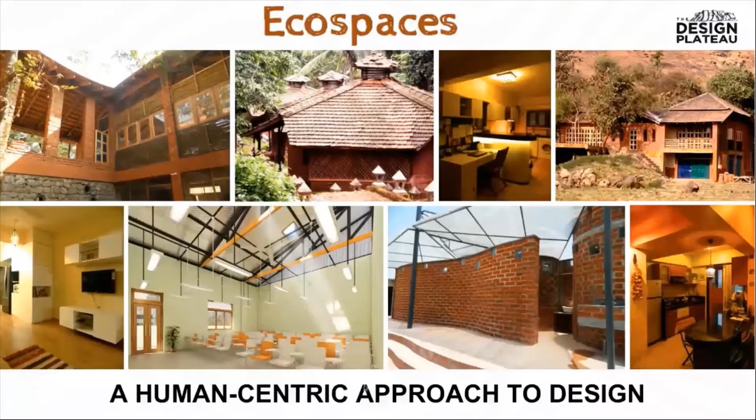If you look at the world carbon dioxide emissions, we are fourth, so we are contributing in a big way. And if you see the recently released World Meteorological Organization's report on the impact of climate change and the status of the world countries, you'll see that there are huge impacts. For example, our global carbon dioxide emissions have hit a record high of 407 parts per million in 2018. The ocean heat has recorded the highest levels.

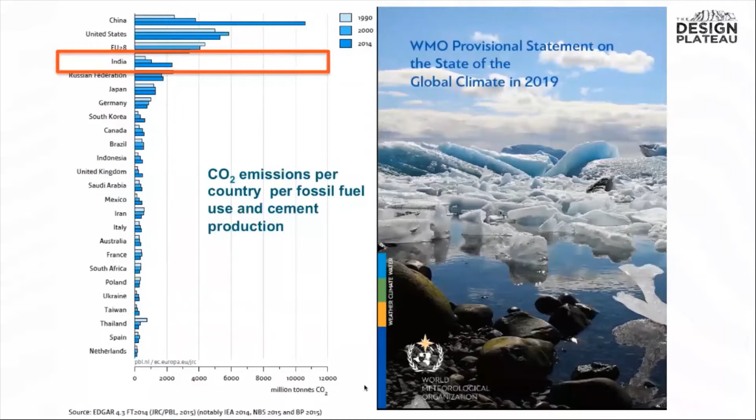And because of this, there's melting of ice, there's a whole change in our global ecosystem. Almost 26% of the seawater is today acidic as compared to pre-industrial times. And one of the main impacts that we are going to face is more erratic rainfall and weather patterns, threat to our food systems, and a whole lot of other challenges such as floodings that we will have to be prepared for in the future. And architects do have a big role to play in this.

So let's look at the building sector and its contribution to this whole mess that we have created in the last few hundred years. We are the single largest contributor to climate change. 30 to 40% of the total global greenhouse gas emissions are because of buildings, in addition to 1/3 of the global energy use. We use 40 to 50% of the total flow.

Almost 3 billion tons of raw materials are being used. We generate 25 to 40% of solid waste, and 12% of global water use is used in buildings, which of course does not account for the whole lot of other water use in materials.

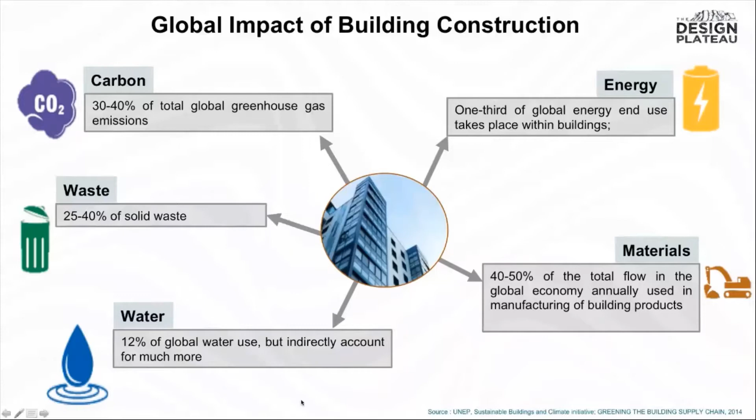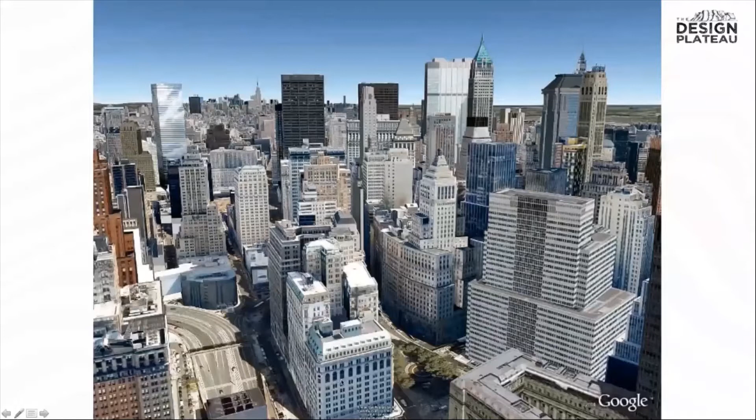So the built environment has an impact which is one of the largest. It's next only to agriculture in the impact it has had on the Earth's ecosystems. We have changed the face of the Earth in many, many ways.

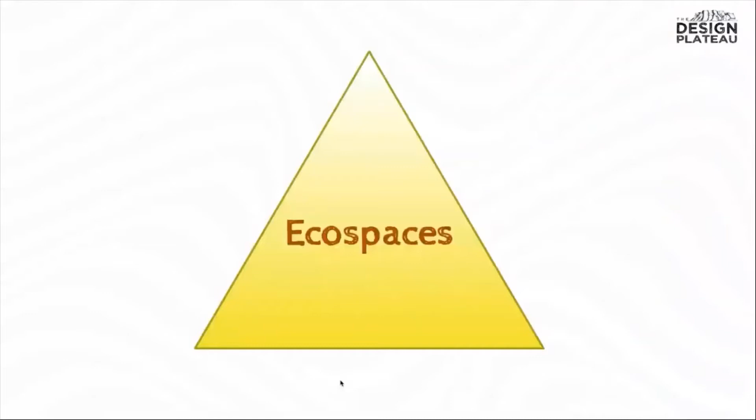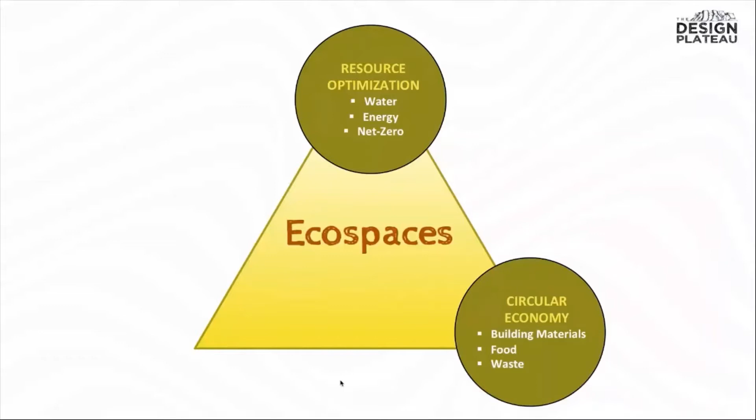So let's look at ecospaces, what it is, and what are the three cornerstones of this concept. The three cornerstones: one of them is resource optimization, using minimal resources. We are focusing here on water, energy, and making everything net zero. Circular economy, this principle of making everything from linear to circular, just as it is in nature, which involves building materials, our food system, and waste.

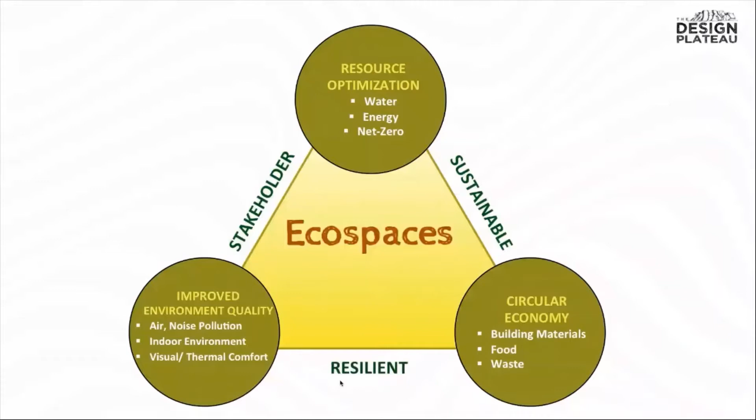And lastly, improving our environment quality, whether it is the outdoor air and noise or the indoor environment and the visual and the thermal comfort. All of these three are related, and they have a deep connection with sustainability, with making things resilient, and stakeholder engagement.

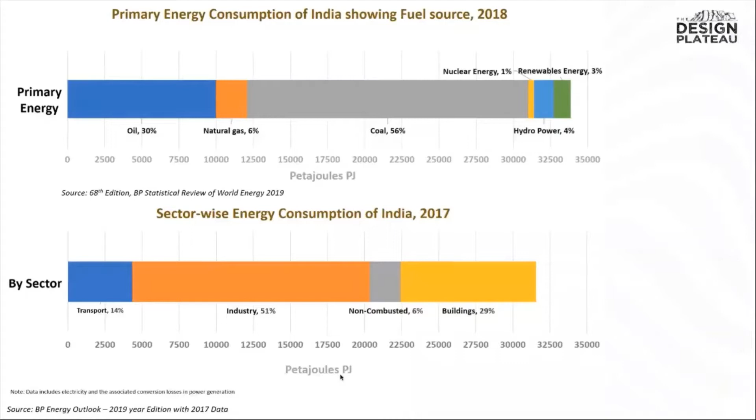So both these two graphs show us where we need to go. We need to be more energy efficient, reduce the fossil fuel, and then move towards renewable energy. So our challenge is plugging the fossil fuel emissions. So how can we go about doing this? If you bifurcate or trifurcate the problem, it exists in three ways. One is designing energy efficient envelope. The second is energy efficient equipment. And the third is going towards renewable energy.

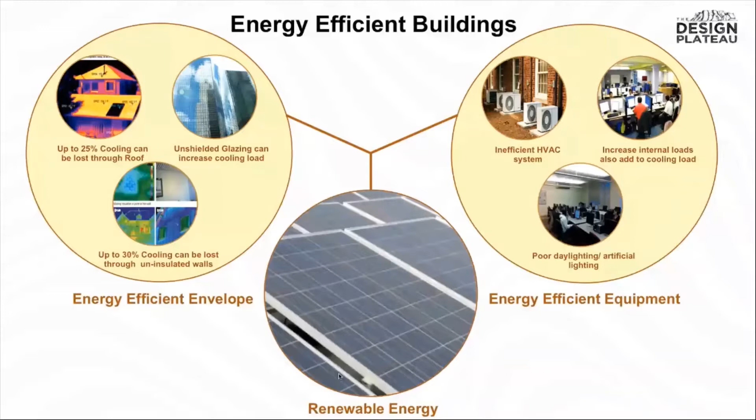This goes in a sequential way. For example, first make it an energy efficient envelope. So then you reduce your cooling loads, reduce your lighting loads, be energy efficient, and then the minimal thing that is left can be done with renewable energy.

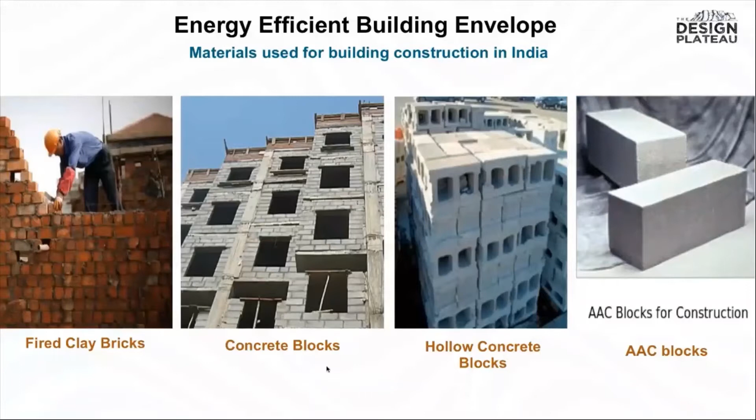If you look at building envelope, we haven't gone very far in India. For the external partition walls, we're still using fired clay bricks, concrete blocks, hollow concrete blocks. And it's very recent that we have come up with something as efficient as the AAC blocks, or autoclaved aerated concrete blocks, which are far more energy efficient. The challenge is in terms of the external building envelope, how to reduce the thermal transmittance of the wall.

So if you look at existing ones, where do we stand? A typical 230 mm brick wall, its U value is 1.5. And if our target is something like 0.4, we are way away from it, almost 3 times as much. So we have a long way to go. If we reach 0.4, then we are reducing the building's energy consumption to a big extent, 15 to 20% more efficient. And of course, that has a cumulative impact on the air conditioning load as well.

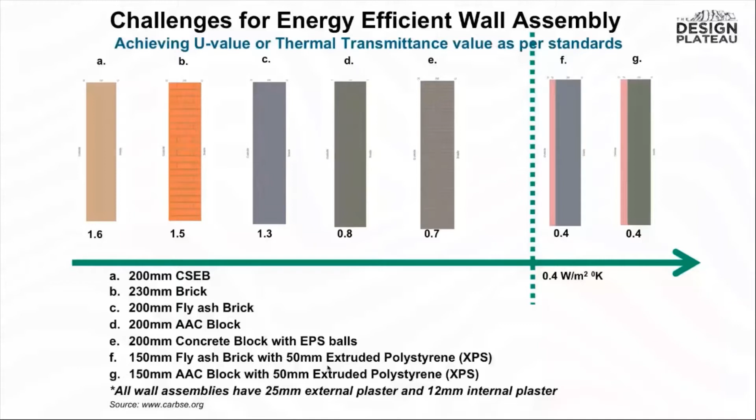So these are the given standards. We have the Energy Conservation Building Code, with standards for warm and humid climate, for example, of 0.4, and the existing walling material that we use do not reach this at all. So we have to be very careful about what we use on the external envelope.

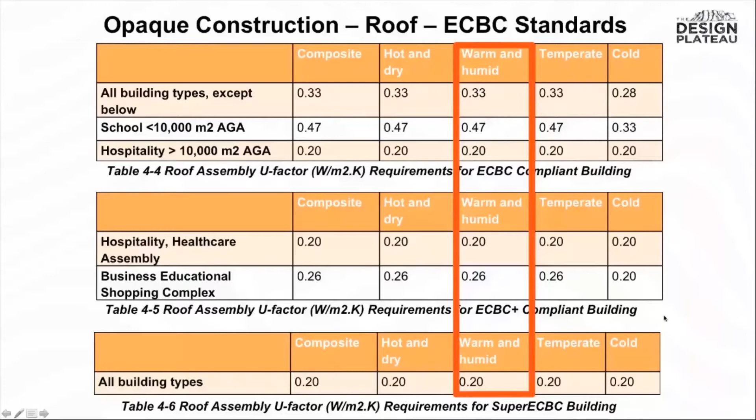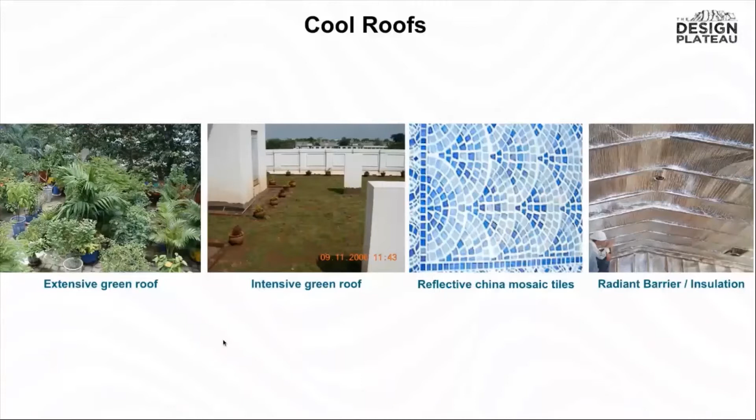So there are various ways. Of course, using a good material and a good insulation is the first step. But there are various other ways in which it can also be achieved, such as using extensive green roofs, shading for your roof. You can use a grass lawn on the top of your roof. You can have reflective China mosaic tiles, or you can have high albedo paints, or of course the radiant barrier insulation, which is the cheapest option among all these things. So there are various options, but it's important to know that we need to do this.

Now, there is a huge scope in all this to reduce the energy consumption. For example, what kind of lights can we make? Can we use more efficient lights, less lights, because there are so many lights in many places which are not being used, or they are just put on and so on.

There are fans. We have today the brushless DC fans, which consume half of what the typical conventional fans do. And then we have the 5-star air conditioners, which can reduce to a great extent the energy consumption.

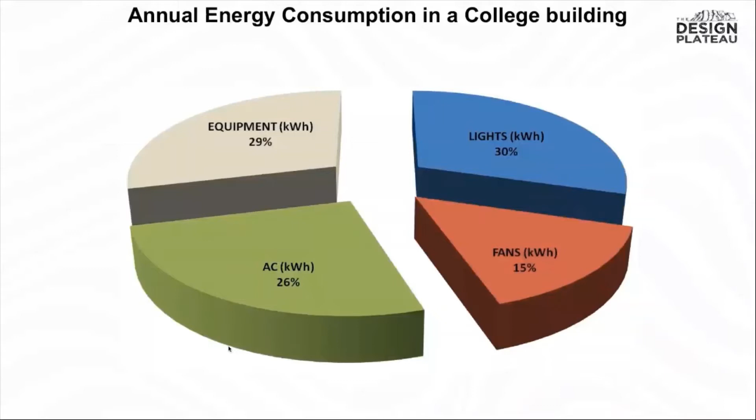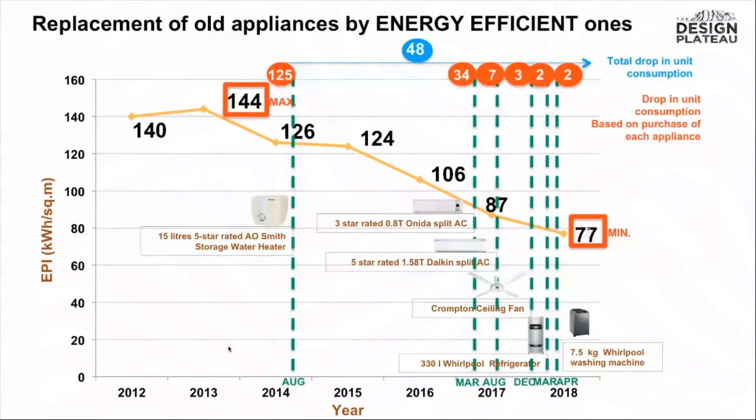And of course, the last step, which is making the building net zero or nearly zero. The Bureau of Energy Efficiency of the Government of India defines a nearly zero energy building as one which uses less than 15 kilowatt hour per meter square per year. This is a very high target, and this is similar to the passive house target. But if this can be achieved, we will be way ahead in reducing our carbon emissions.

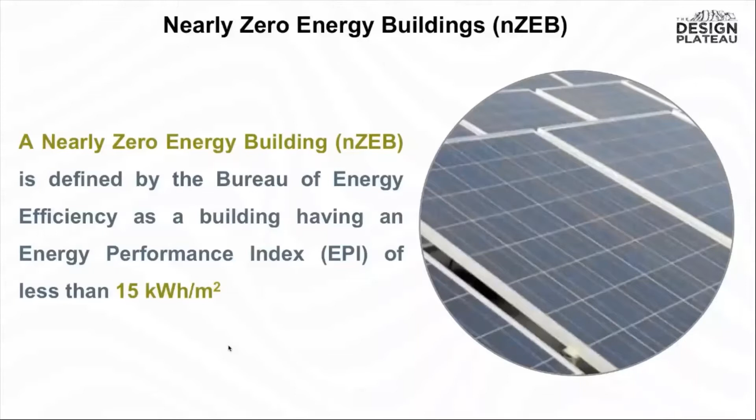And can this be done? Yes, we have the example of our own Paryavaran Bhavan in New Delhi, India, which is India's first net zero energy building, which simply uses a tremendous amount of natural light and optimizes the natural light. It's a multi-storied building, and the entire roof has been used for putting up solar panels, and it also provides shading to the building. And not only is it a net zero energy building, it's a net positive building. So if a government building can be done, I'm sure all buildings can be done. It's a challenge, but I'm sure it is possible.

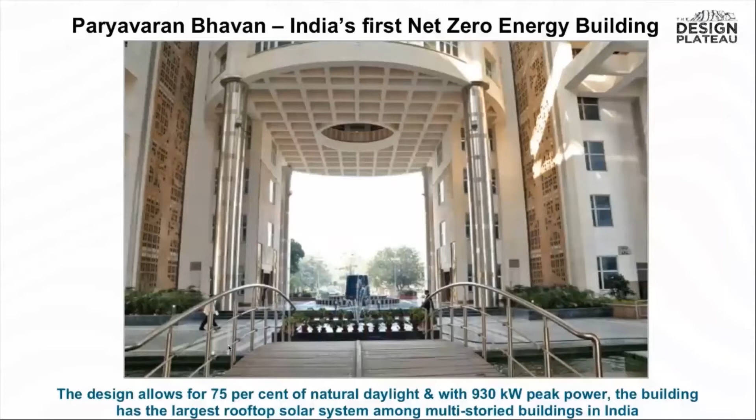The next part of resource optimization which I would like to address is water efficiency. The first step to water efficiency is making use of water efficient equipment, flow restrictors, pressure reducing valves, low flow rate systems, dual flush, installing water meters, sensor-based taps. All of these can make your water consumption lower.

Of course, a very important aspect in this is how you maintain and monitor the performance of these. It's just not that when you make it, it will give you all the performance. You have to make sure it does perform.

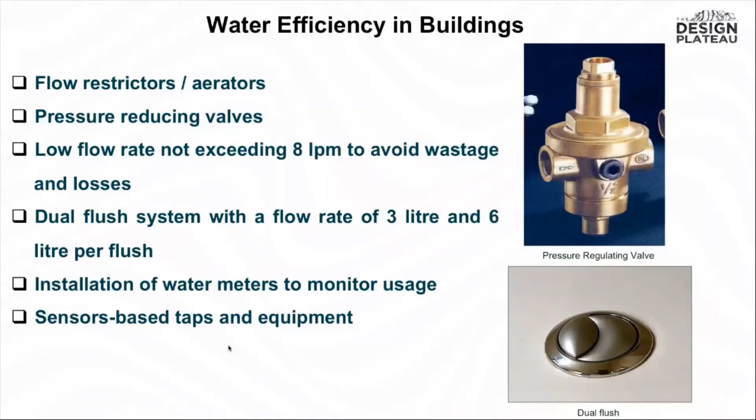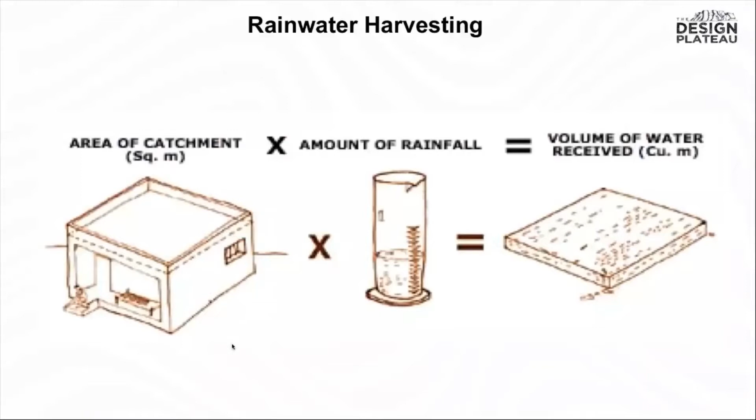The second thing that can be done is rainwater harvesting. Whatever your site is becomes the catchment, and the amount of rainfall falling in your area, the average annual rainfall, becomes the source, and the volume can be calculated. And this can be either stored somewhere, or it can be put into the ground, because we are not putting enough water into the ground. Our groundwater reserves are drying, and it's very important that we do this to revive our aquifers.

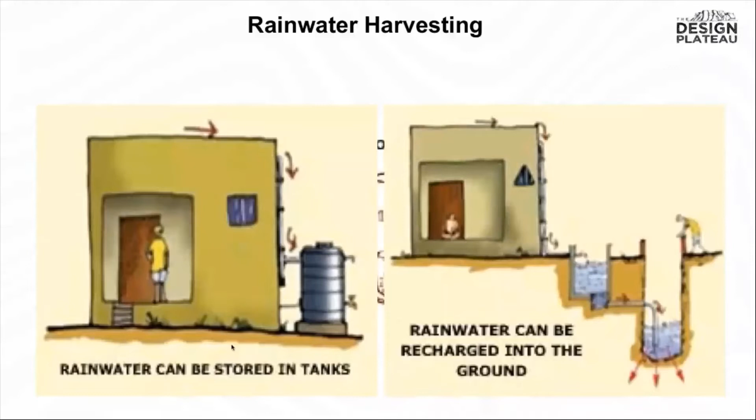It is possible to do rainwater harvesting. We have done it in numerous housing societies and different institutions, and people have done it because they actually needed it. The first case here in Dombivli, they had a severe shortage of water. Relying on tankers was an issue, and therefore making your own water available was a boon for them.

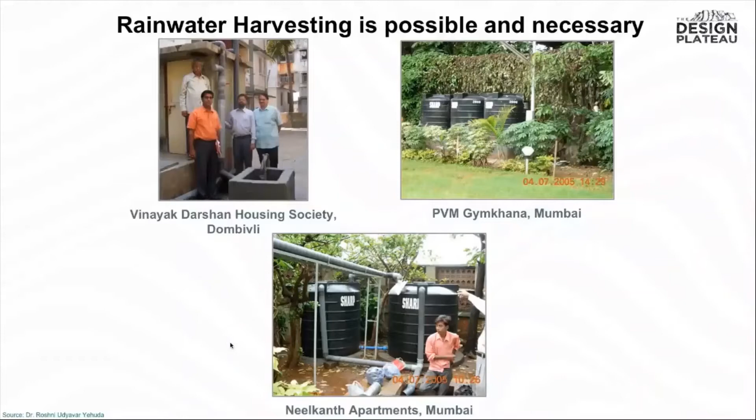In another case, for example, the water helped them with extra activities such as cleaning and so on. And in another one, it was just recharging the existing bore well. So rainwater harvesting can be done individually. It can also be done at a community level.

There are numerous examples of this. And of course, the National Environmental Engineering Research Institute has also come up with a phytorid treatment system very similar to this, which is a very efficient way of treating your gray water and your black water within your system.

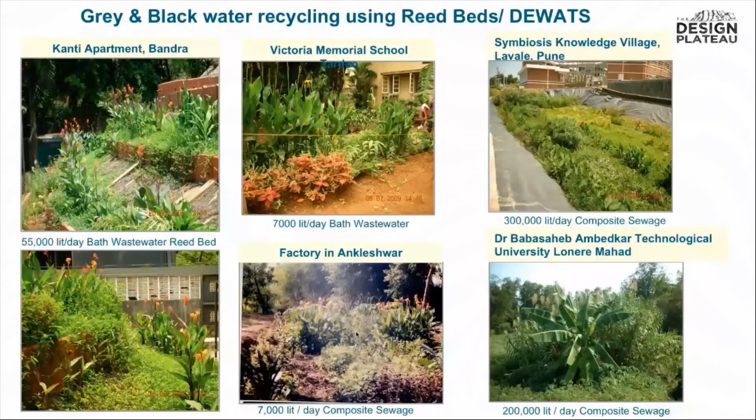The second corner of our triangle is about circular economy, and this is a very popular term today. But basically, as far as buildings are concerned, it is a life cycle analysis approach. It applies to all building materials. It applies to buildings. So even if you take a simple building material such as concrete, the resource optimization can take place by changing different aspects of it, such as use of different types of sand and so on.

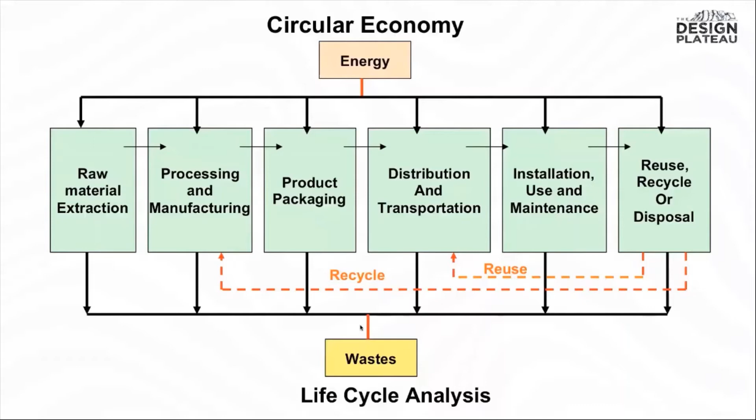And basically seeing that through the life cycle, for example, in the manufacture of tiles, some part of it can go back into the system, and then you use much less raw materials, much less virgin materials. This is the whole idea of the circular economy, to make use of waste as a resource, to go back into the system. So life cycle assessment is a way of assessment which is a holistic yardstick for environmental performance,

which looks at climate change, acidification, eutrophication, fossil fuel, ozone depletion. What are the various different steps in the manufacture of a building material which causes damage to the environment? So it's a very important tool for you to assess.

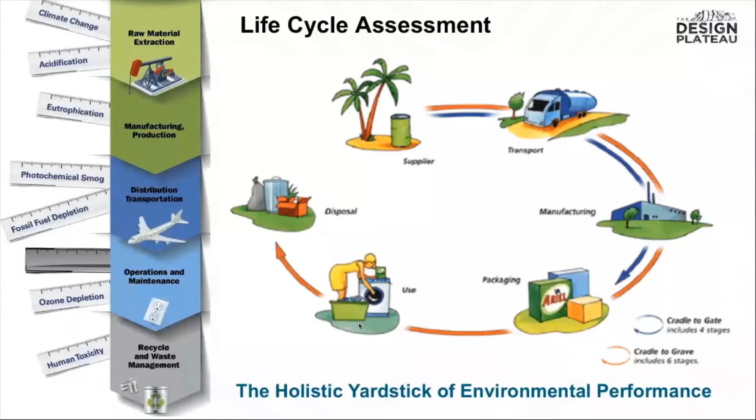And one of the things that is part of a circular economy and the life cycle analysis approach is the embodied energy of a material. How much is the embodied energy? We try and use materials which have low embodied energy, or materials which can be recycled and reused. Even if they are high embodied energy, we can have that aspect of recycle. Of course, recycling takes a little bit more energy as well.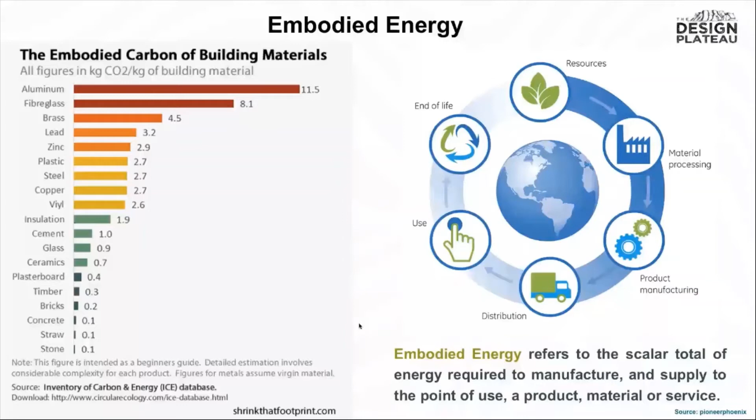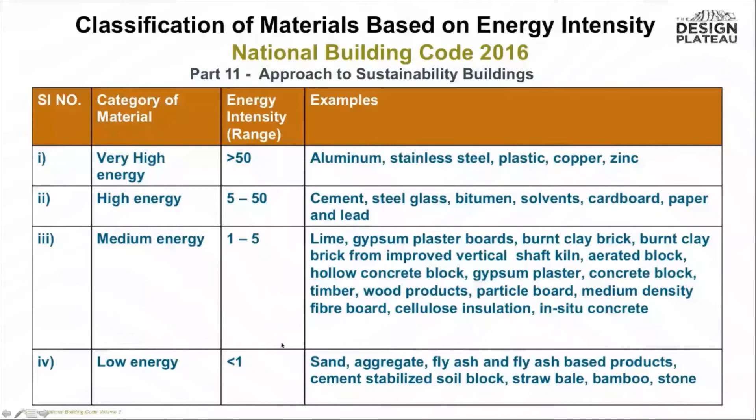So the National Building Code 2016 came up with a whole chapter on approach to sustainability in buildings, and it provided various categories of building materials, such as very high embodied energy, high to medium embodied energy, and so on, which can be used as a tool for us to understand what materials to use. In general, these are the various characteristics of sustainable building materials. We can see that it is important to use materials which last longer or which are durable.

You can see outside the circle all these various points that are mentioned: low embodied energy, materials that can be recycled, materials which are rapidly renewable, such as bamboo, or materials which have minimum water consumption during their manufacture, and so on. So this is just a tool. There are more than about 50 different parameters for measuring sustainability of a building material, and there are various indices by which you can measure them as well.

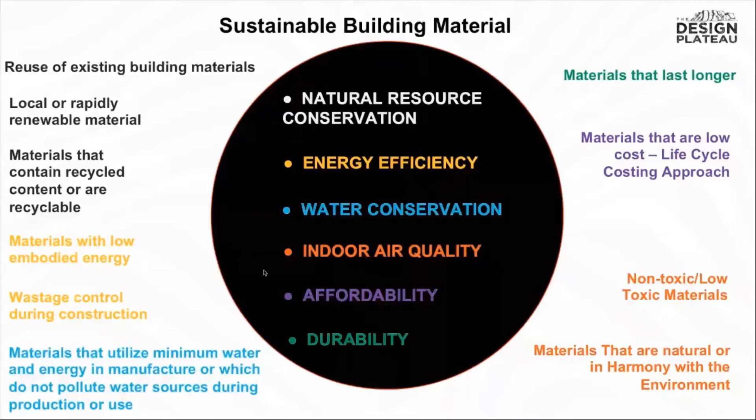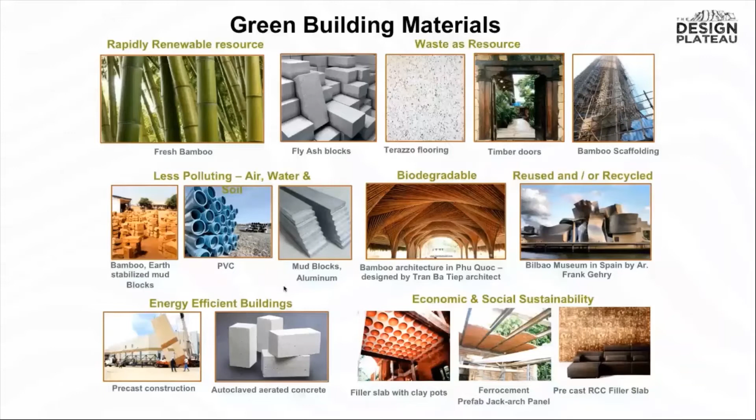What are the different options available for us? So there are different principles behind these materials which have been chosen here. For example, you have bamboo, which is a rapidly renewable material. You have fly ash blocks, which are using waste as a resource. You have the filler slabs, which use clay pots, reducing the resource consumption. You have precast, which reduces time of construction. You have use of organic materials such as bagasse, coir, wood substitutes, and so on. These are all different materials which are available for us to use as green building materials.

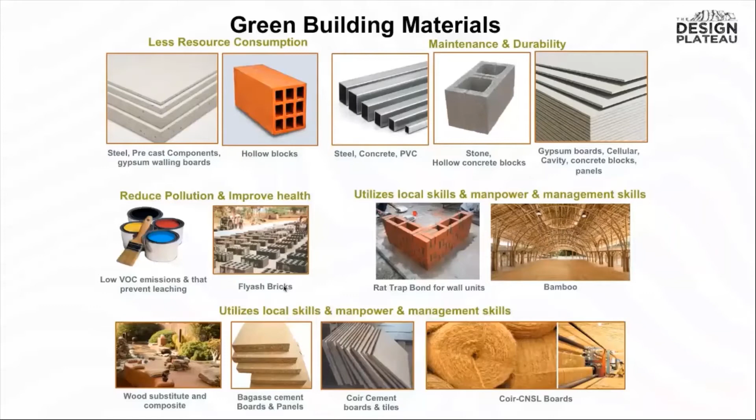Here I'm sharing with you an example of a building where we tried to predominantly use all the principles, such as bamboo walls. It was an artist house and studio. So we used bamboo walls, filler slabs, local stone, rubber tires, reuse of old doors and windows, mud and cow dung flooring, and we tried to not disturb the landscape in the place. So there was a courtyard, the trees remained, and so on.

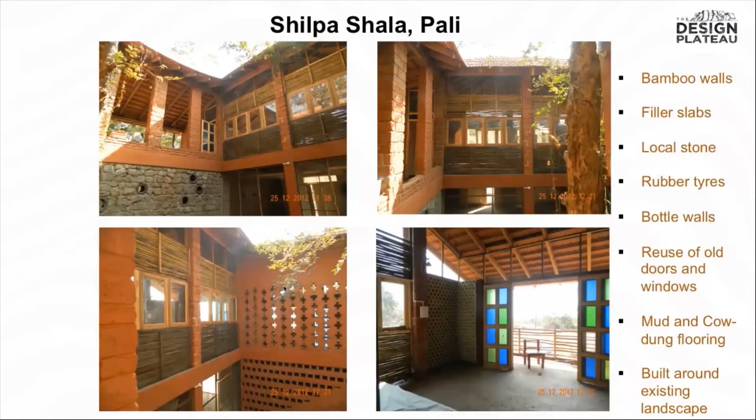Of course, Auroville is an example. In the south of India, we have Auroville, a small community of people who have done a lot of experiments in building materials which are sustainable, such as adobe walls, compressed stabilized earth blocks, ferro cement, wattle and daub structures, and various other things. Two examples that I would like to share as far as building materials.

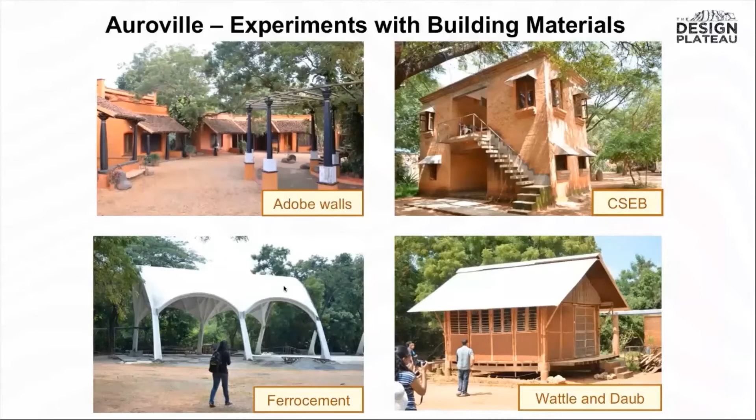The first one, not in India, is a San Francisco Bay Conservation Center. It uses straw bale, a material that is in abundance with almost all farmers. Use it as a wall. It provides a very balanced temperature throughout the year indoors. It's a natural material and it provides you excellent indoor air quality.

The second example is a building in Mumbai wherein the entire building debris was crushed on site to generate new bricks and new material for the building on the site itself. So, no pollution involved, no topsoil removal, and so on. So, no virgin materials, following the principles of circular economy.

Another thing that needs real attention in terms of circular economy is waste. We all know that waste is a huge issue around every mega city. We have huge dumping grounds. We have hectares and hectares of land which we use for dumping our waste simply because we are not segregating them at source. And there are so many negative impacts of this, such as the air pollution, the soil, groundwater, and the marine pollution that occurs, the odor. And of course, the worst of all is the bioaerosols, which go into our environment and can affect our health.

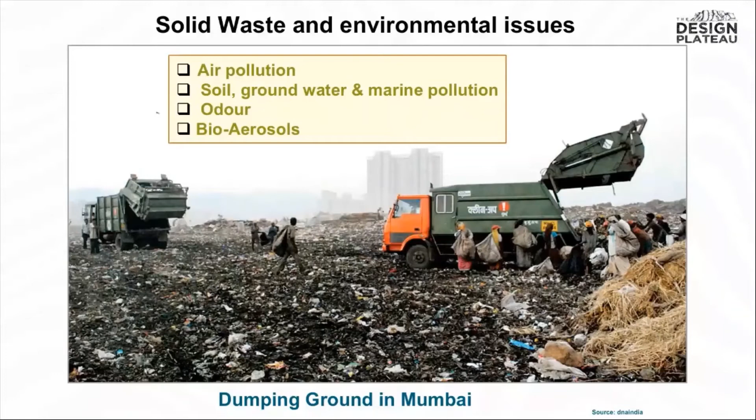So, decentralized waste management within the building system itself, depending upon the kind of waste. The characterization of the waste is very important, so we can decide whether it can be vermicomposting, organic composting, biogas, which can also include night soil if it's a small building, and where there is no space whatsoever, not really recommending, but then electrical composting is also possible, which gives you compost in a very short period of time.

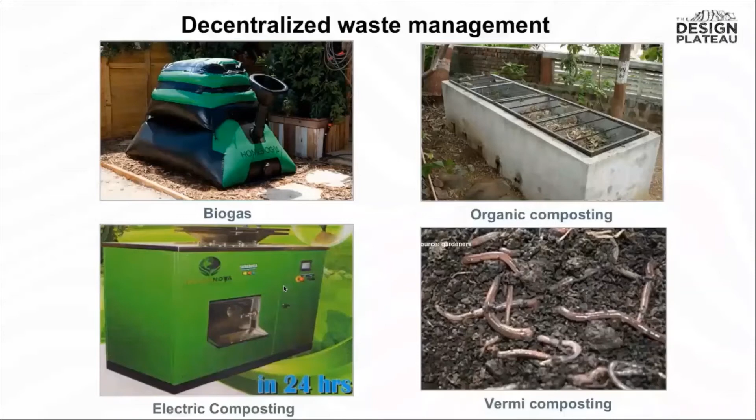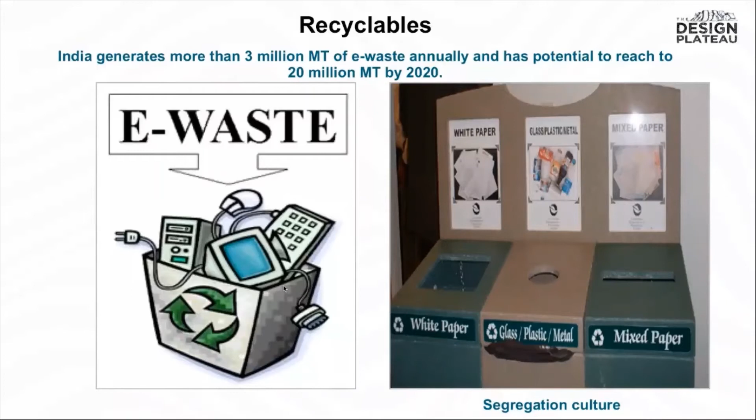Then dealing with the recyclables, every building should have the facility for segregating and dealing with the e-waste, which we generate a huge amount of, as well as all the other waste. Of course, in India, we do recycle a lot.

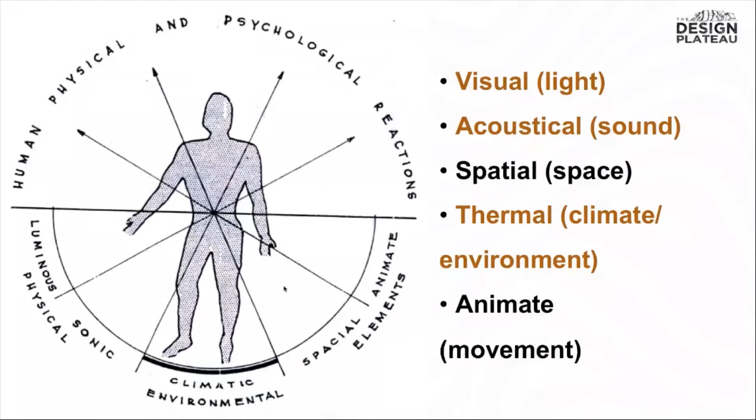The last of our three triangle is the improved environment quality. Most of our design is centered around making human beings comfortable, whether it is psychological comfort, physical comfort, spatial comfort, acoustical comfort. So all these aspects are very important, and here I'm focusing on the thermal environment, maybe the visual environment, and also the acoustical. As far as the thermal environment is concerned, of course, we can use mechanical energy and make yourself comfortable, but that's going to use a lot of energy.

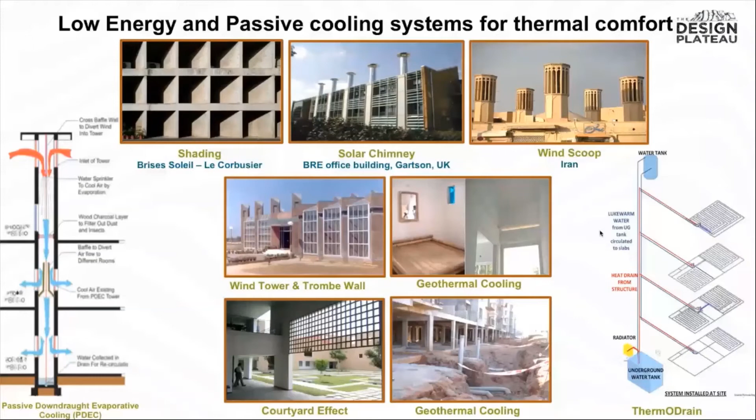So here are some passive cooling techniques, simple ones: shading. Then you have the solar chimney used for decades. Historically, we have the wind scoop. We have geothermal cooling, which is using the Earth's temperature. We have Trombe wall. We have wind tower. And of late, we have the passive downdraft evaporative cooling systems, which use water for cooling, and also the ThermODrain system, an entire system which uses water as a means of cooling and providing thermal comfort inside buildings. So I'll share with you two examples of what was done in buildings.

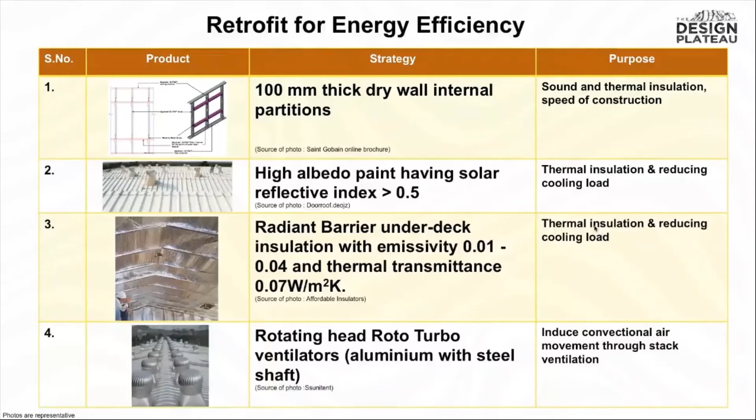The first one is a college building in Mumbai where we had done a retrofit for achieving thermal comfort and energy efficiency. The building was highly uncomfortable on the topmost floor. So, among the various things introduced to make the building more comfortable were the dry walls, the use of high albedo paints, the use of radiant barrier material, which, as you know, has very low thermal transmittance. It's a very low emissivity material. And we have turbo ventilators, which induce stack effect. We had polycarbonate sheets, which allowed more light. We removed the walls, and above the walls, we provided sheets which allowed light, and we added more skylights.

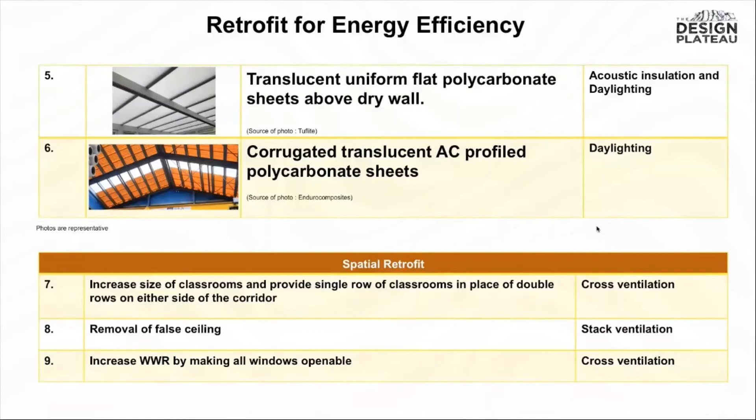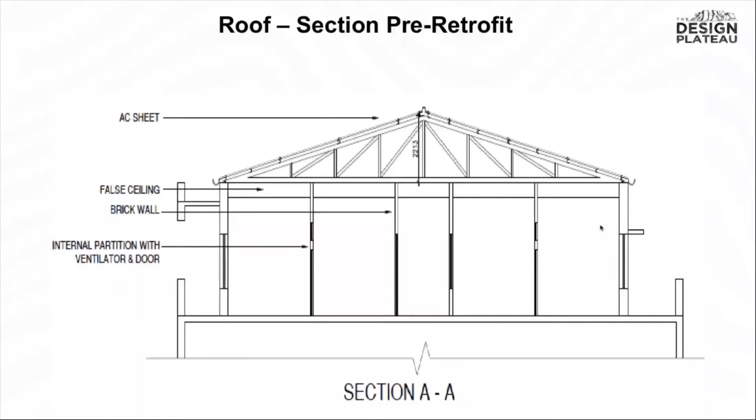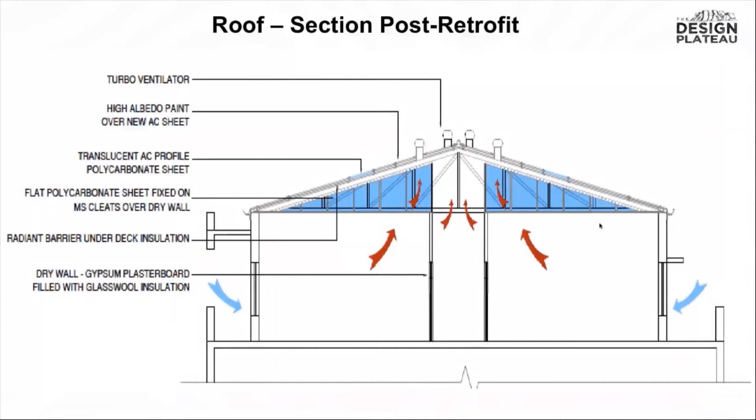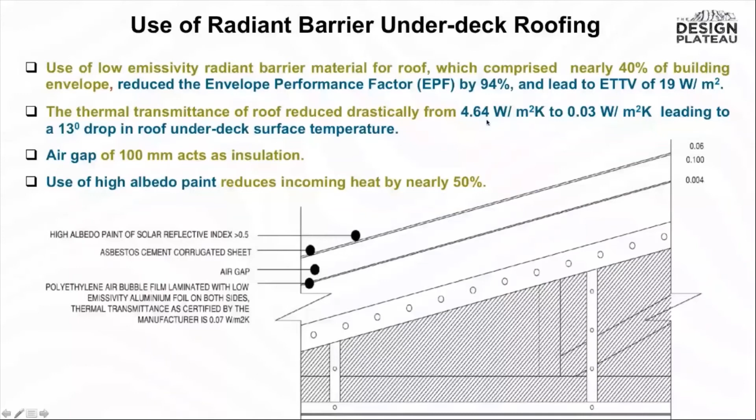And of course, in terms of spatial retrofit, we added cross ventilation by increasing the windows, by removing a false ceiling and allowing for stack ventilation. So a typical building where you have false ceiling, partitions which stop the flow of air, and we allowed for the flow of air, allowed for convectional movement in a non-air conditioned building, and it showed us results. This shows that with the use of radiant barrier, from 4.64 watts per meter square Kelvin, we reduced the thermal transmittance to 0.03. These are some pictures before and after.

So you can see the volume has been increased, and the radiant barrier material, which does not allow heat to come inside the building. And the results showed us that on an average, with the same temperature and relative humidity compared, we had an average roof bottom temperature difference of more than 10 degrees, almost 13 degrees. So that means a better indoor environment because the overall mean radiant temperature of the building is reduced.

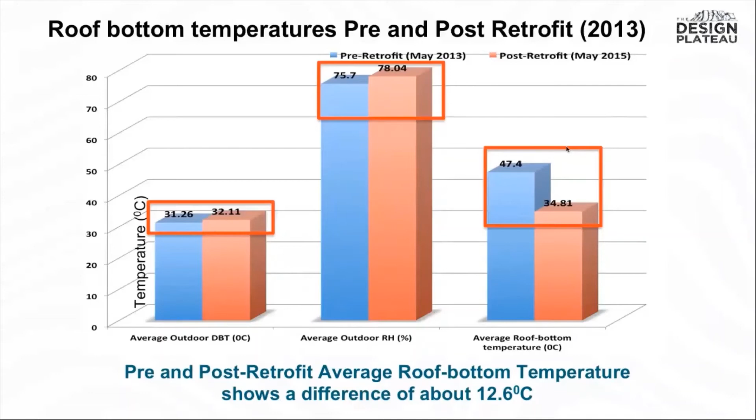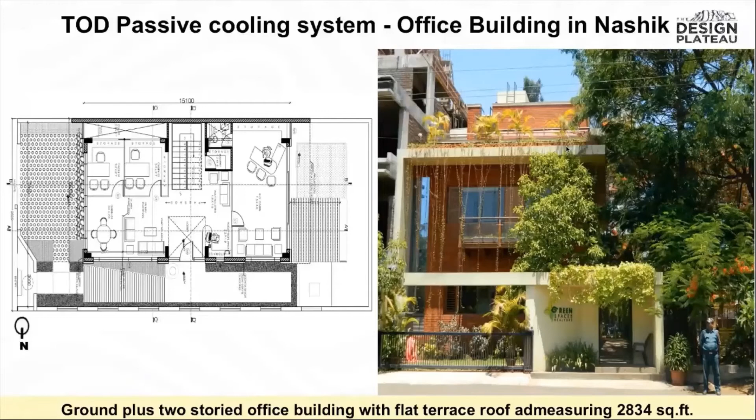This is the second example of a passive cooling system, a building in Nashik which uses a thermo drain system using water stored in an underground tank to cool the building. These are pictures of when the construction was going on and after completion. And the results were excellent. This building does not use any energy for any air conditioning system for cooling.

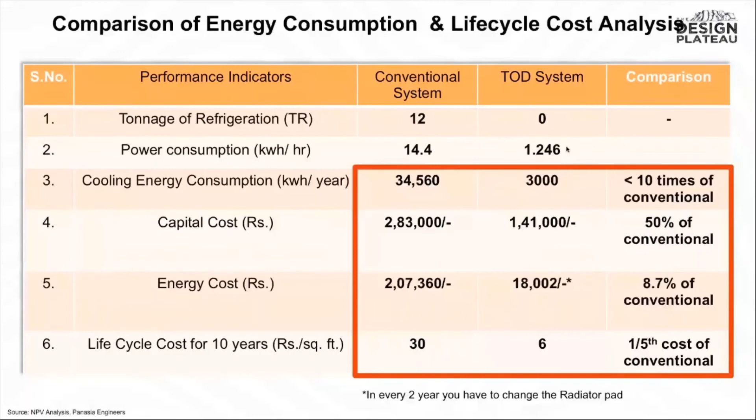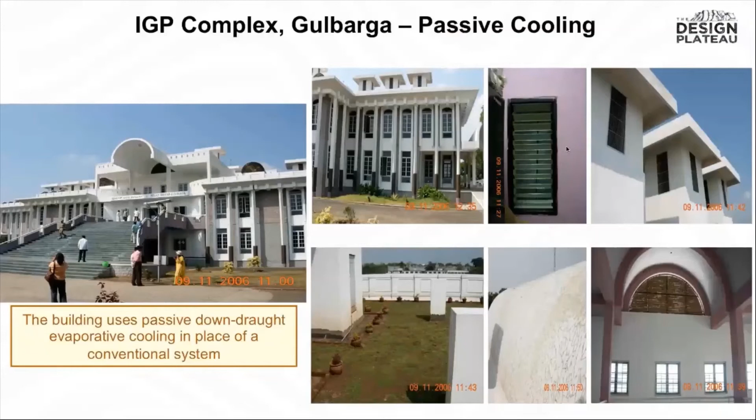And what we found is this TOD system's energy consumption is less than 10 times. The capital cost is almost half, and the energy cost, which is a recurring cost, is almost 8.7% of the conventional system, and the overall life cycle cost is 1/5. A similar low energy passive cooling system is the down draught evaporative cooling system, which was used in the IGP complex in Gulbarga very successfully.

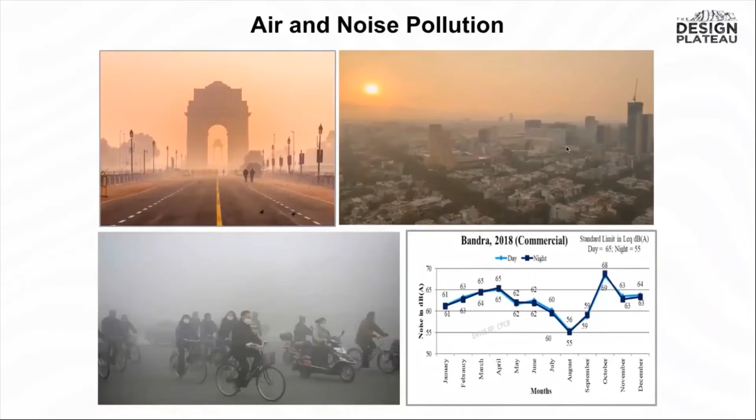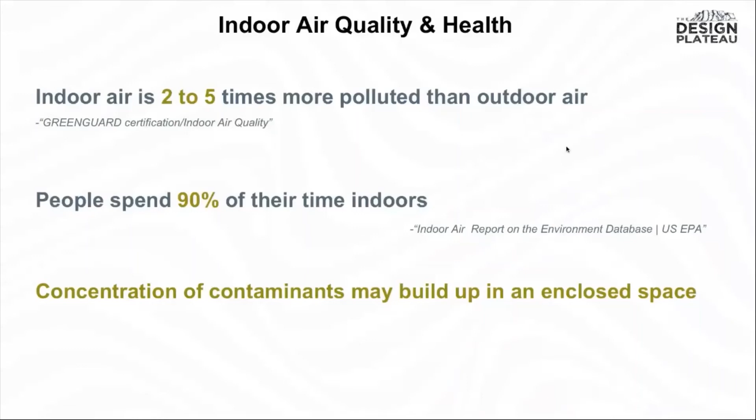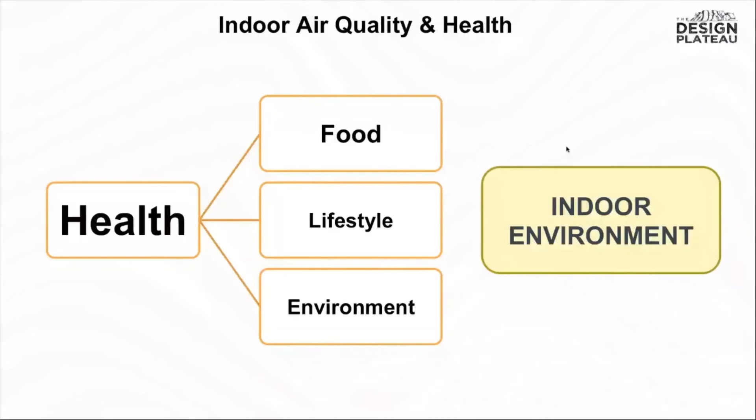Among the other aspects indoors is air and noise pollution. Our cities have all these issues of air and noise, and whatever is outdoor eventually comes indoors. But what is important is that indoor is far more polluted than outdoor, because we spend a lot of time indoors, and the contaminants tend to concentrate in an enclosed space. So our idea of what is responsible for good health is either eating the right food, having the right lifestyle, or staying in the right environment. But it's also important that you have a good indoor environment, or rather a poor indoor environment can lead to a sick building.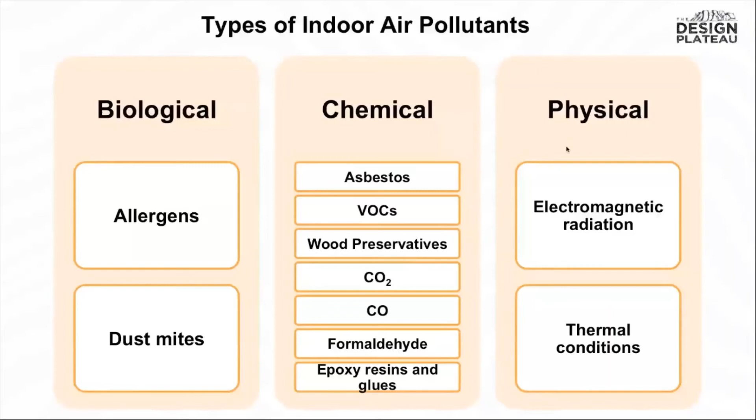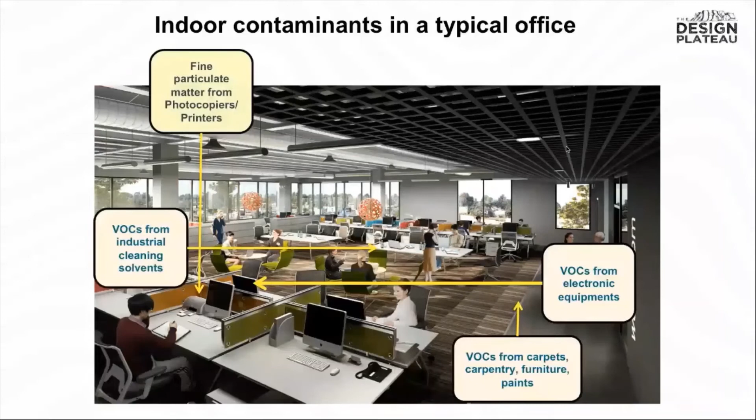So these are the various contaminants: the physical, biological, and chemical. The biological ones are the most dangerous. The chemical ones are important because they can have long-term impacts, and the physical ones are also very important. So in a typical office, you have these various pollutants: VOCs, the volatile organic compounds, dust, biological contaminants, and so on.

But overall, if you want to make your building healthy, you have to see that it is non-contaminated or not a brownfield site. If it is a brownfield, it has to be treated. You have to have universal access to all people. You have to see that it's earthquake and fire resistant, climatically sensitive, energy efficient, and well insulated in terms of sound. That means it eliminates all the bad sound.

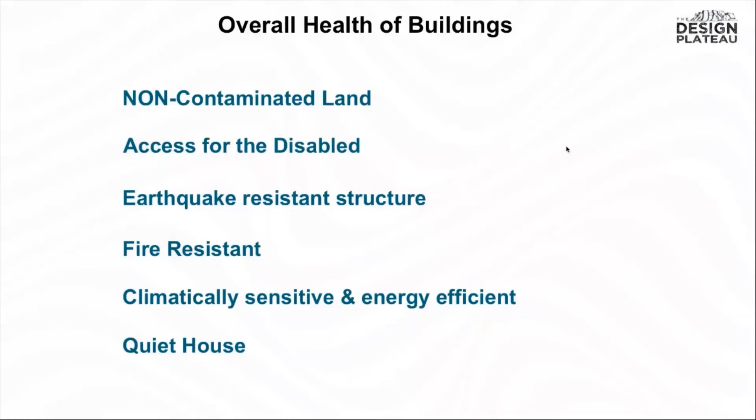And here I want to give an example of a house in Kemps Corner, Mumbai, which uses traditional practices for improving the indoor environment. They use cow dung flooring, lime plaster, copper, timber, no use of chemicals at all. So the indoor environment of this house is something to experience. Research has proven that plants indoors are not only capable of purifying the chemicals in the environment, but, if present in adequate quantities, can also lower the temperature and provide you a better indoor environment.

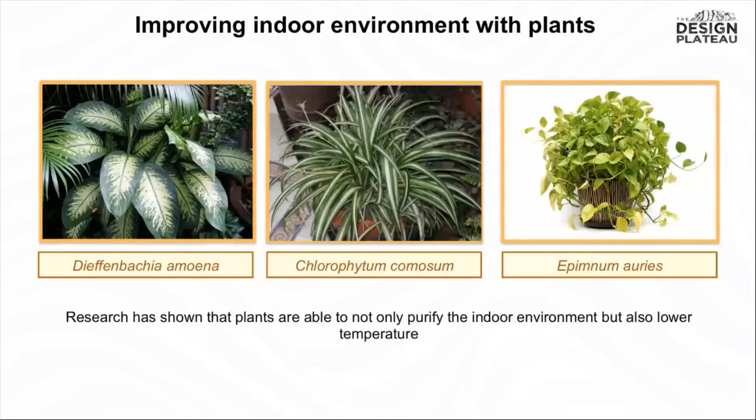I'll discuss with you a few standards and benchmarks which are very important with reference to all that I have spoken so far. First is the National Building Code 2016, which has a new chapter, Chapter 11, on approach to sustainability, which gives you an idea on how to design sustainable buildings. And the Energy Conservation Building Code, which was launched in 2007, has a newer version released in 2017. These were for commercial buildings. And now we also have the Eco Niwas Samhita for residential buildings. So many of the states in India have already mandated the use of these codes.

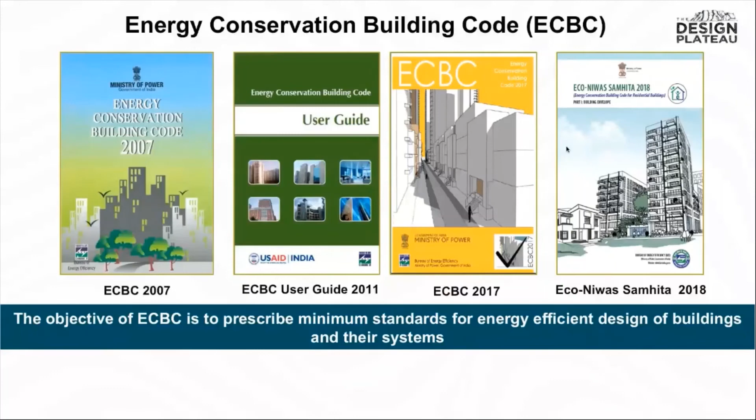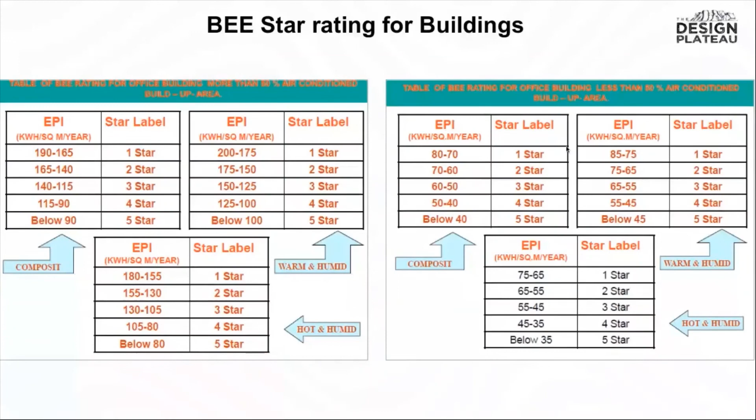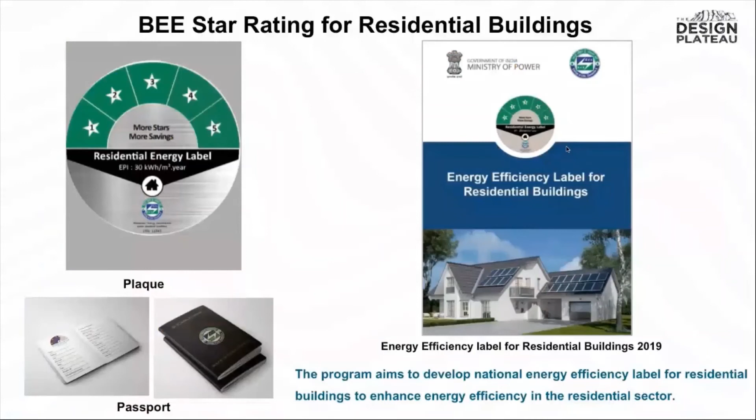Then we have the voluntary star rating system to measure your energy performance index, and you can get a labeling for that. This is for commercial buildings. Similarly, it has also been started now for residential buildings. So you can put a plaque outside your house if your house is energy efficient. And that also sends a message to others to make their house energy efficient.

Lastly, a few models that I want to share. The first one is the Empire State Building in New York, a building that was built in the 1930s, a massive building, but it had a huge energy consumption. But it has managed to reduce its energy consumption by almost 40% by retrofit.

Retrofit includes windows. Almost 6,500 windows were changed from single glazed to triple glazed. The change in the chiller systems and many other things have made a huge change in the energy consumption of this building, and this can be done in all the cases.

A far newer example is the Tel Aviv University's Porter School, or what is popularly called the Capsule Building, which uses a very innovative system of solar vacuum pipes on the facade of the building to cool the building. So again, no conventional air conditioning.

And then, of course, it has various other things. It is treating the wastewater right there in the compound itself. It has a cool roof with all kinds of plants on the roof, and it uses recycled furniture and so on. A lot of interesting things here.

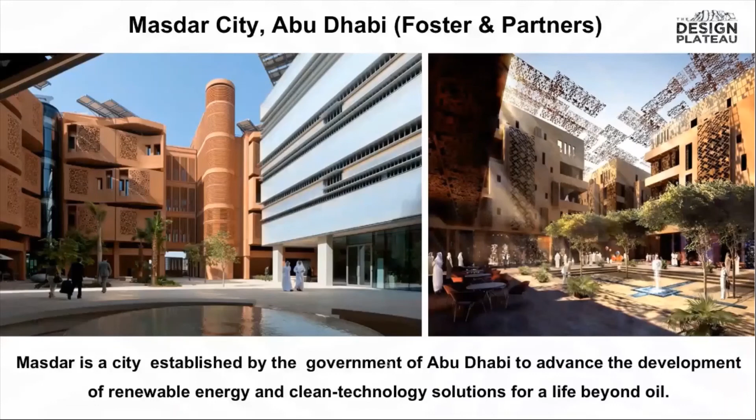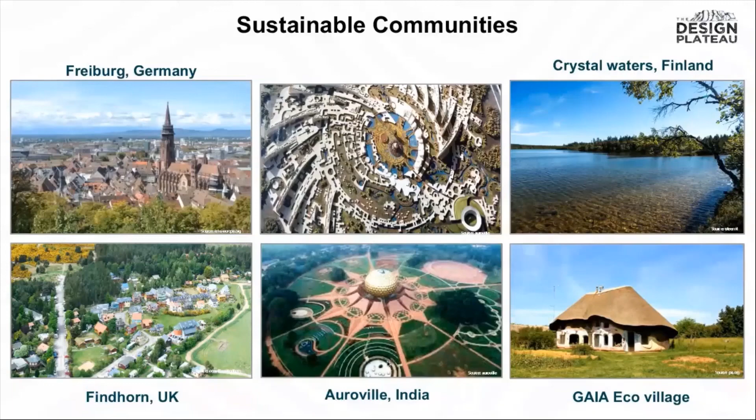And why go very far? If we want to look at the physical characteristics, we have our own cities, beautiful cities of the past. We have a huge cultural heritage to learn from and to replicate for the future.

And the two points that I would like to just expand before I close my talk, and this is related to resilience of buildings and cities. Resilience relates to how we prepare ourselves for the future. And when we talk about the future, one of the biggest challenges is climate change. So already there are cities which are planning to prepare themselves for adaptation to climate change.

So Ho Chi Minh City, Tokyo, London, and many other cities around the world have prepared plans for the future about how to make buildings. Some of them are making buildings which are floating in the water. So what kind of preparation do we have for the future? Resilience.

And the last thing is about stakeholder engagement. And here I would like to give an example of a project on village tourism, which we did with a group of master's students in Sindhudurg district in Maharashtra. 21 villages and 5 circuits. We did a master plan for sustainable village tourism.

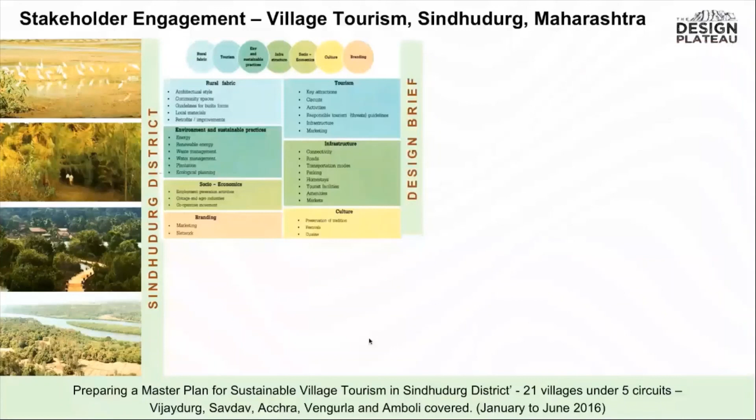The entire focus of this project was stakeholder engagement, beginning with the students themselves who prepared the design brief, and they engaged with the community to see what their needs were, to verify their needs, and a lot of data collection was done to see that the proposals were based on very sound footings.

And so the entire process, right from the district government to the state government to every level of government to people, all the stakeholders were engaged. So this is what I mean by deep stakeholder engagement. The process is really important, that we engage in this kind of process.

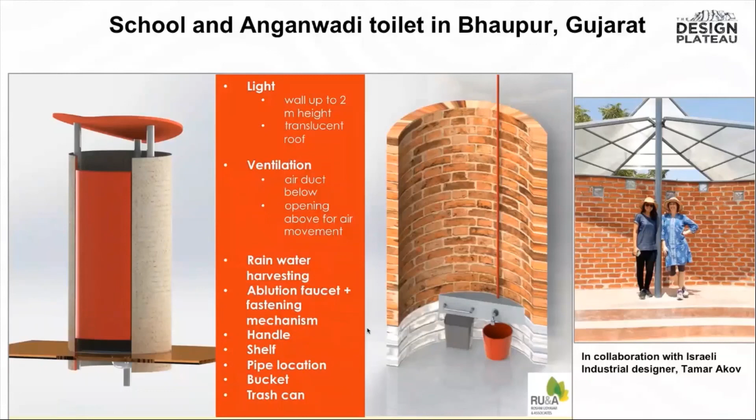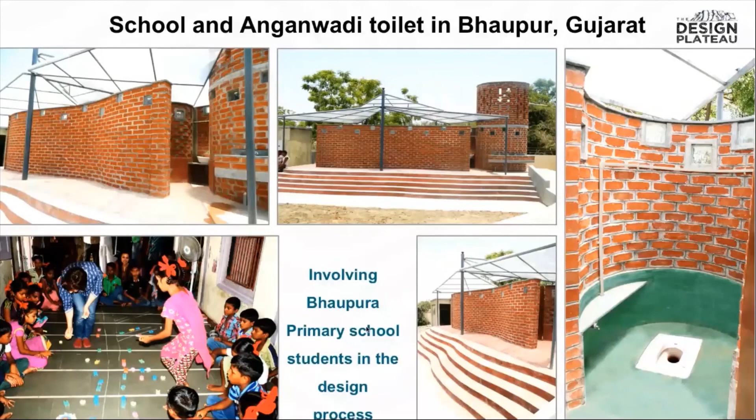So I end with these very important words by our stalwart H. Kumar Vyas, who said, design in the final analysis is an agent of change to enhance and improve our material, psychological, and socio-cultural environments while maintaining harmony with the ecology of our planet.